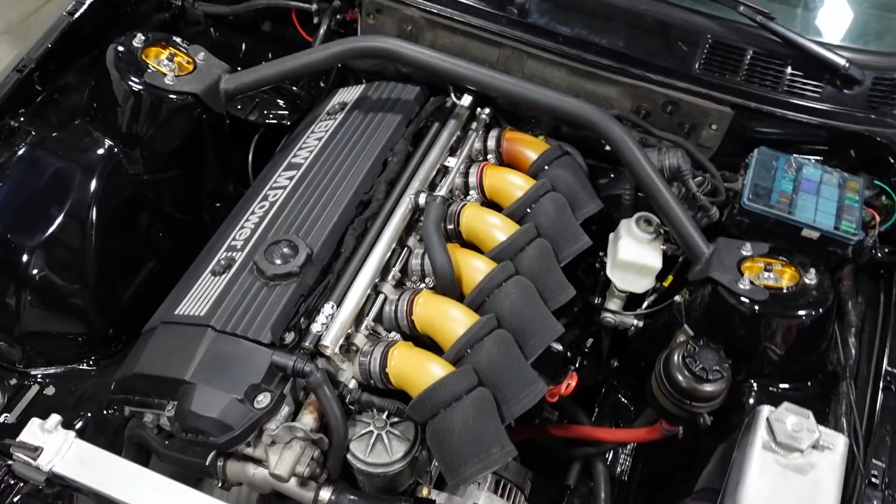What is up, everyone? Today is the big day, hopefully, that we will be dyno tuning the E30. We just did the S54 ITB conversion swap on my S52, which is completely stock. These are S54 stock trumpets, and I shoved some filters on here that are a little too small. We'll talk about that later.

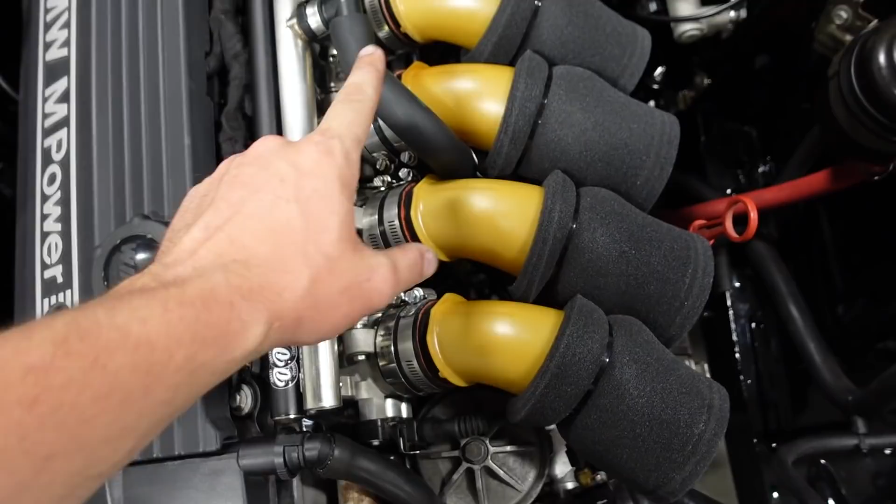Last night I added the IAC finally. One thing I forgot to film was that yesterday I spent the whole day converting the fuel system over. Before, I still had the stock E30 stuff in it, which kind of worked - it had a dinky little pickup pump in the tank and a bigger feed pump on the side by the rocker, so it was a 2-pump system. It was really old and crusty, so it took a long time. I converted it to a single pump system, which we'll see if it's better. I put a DW300 pump in the tank - the DW pumps have always done us so well. Dropped it in there, put a filter in, and now the fuel system is good. We are ready to tune this thing, hopefully, if everything goes well.

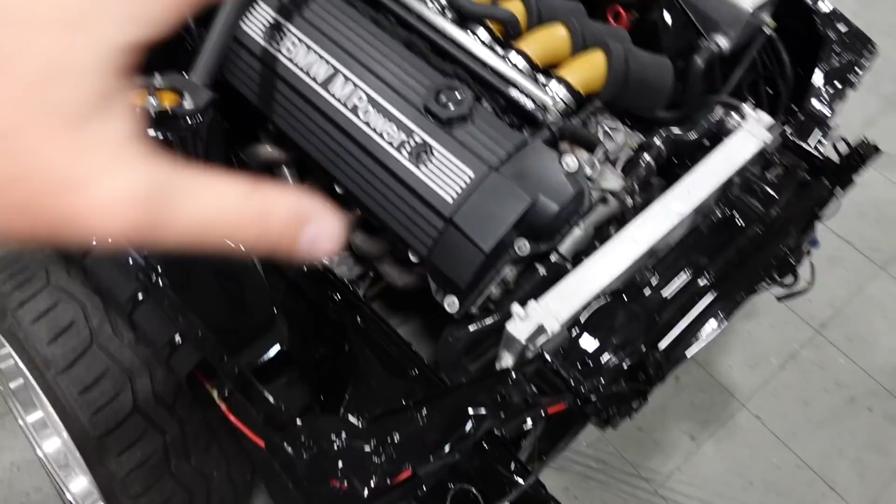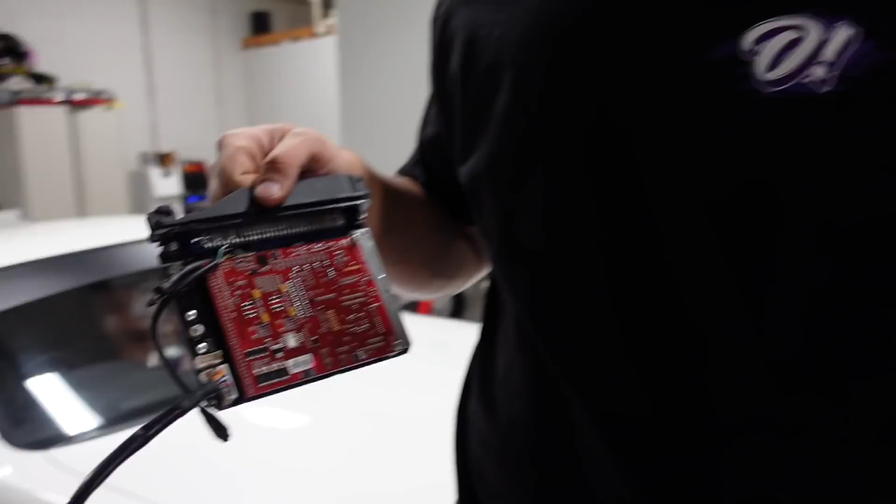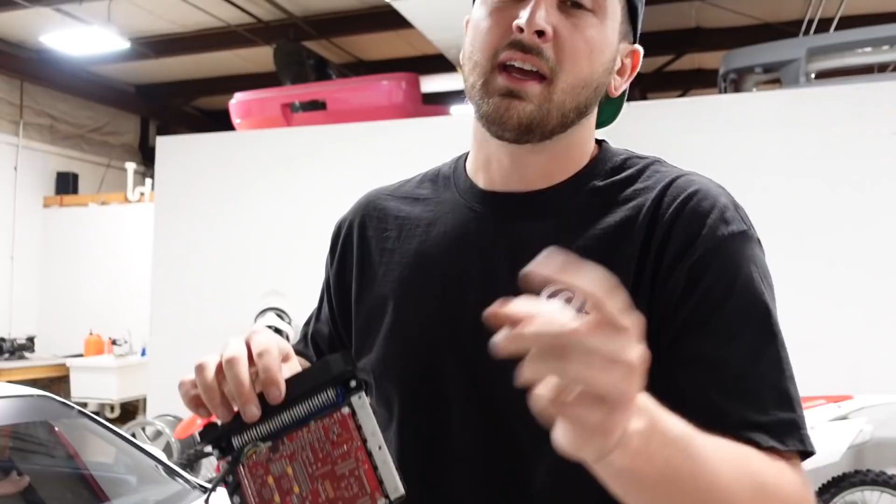So there's one big thing we have to do before we can put this on the dyno. First I had to install my new Link G4X plug and play ECU for the E36. Before I was on MS3 plug and play - it's a decent ECU, gets the job done, but we had a lot of issues with it in Florida, and ever since then I'm not too hot about it. We're upgrading to a Link G4X plug and play E36 ECU, which works with any E36 with an OBD1 harness, and most E36 guys know this. You can convert your OBD2 car to OBD1 by switching out the harness and a couple small sensors. Not that expensive, and it lets you run a full plug and play ECU and get off those stupid chipped ECUs.

This plugs right into the factory harness. You have to take your factory casing to put on here, which makes it really low key. I don't have a factory ECU - that shows up tomorrow, so for now we're just going to throw it in here and not let it touch anything. If you do get a plug and play ECU, I suggest getting the expansion looms because it allows you to add some stuff into the harness, like a fan control and a wideband sensor. So besides that, hop below for all the goods, but let's get this thing plugged in and start setting up a base map.

First time on. There we go. That is good to see. How nice is that? It idles now.

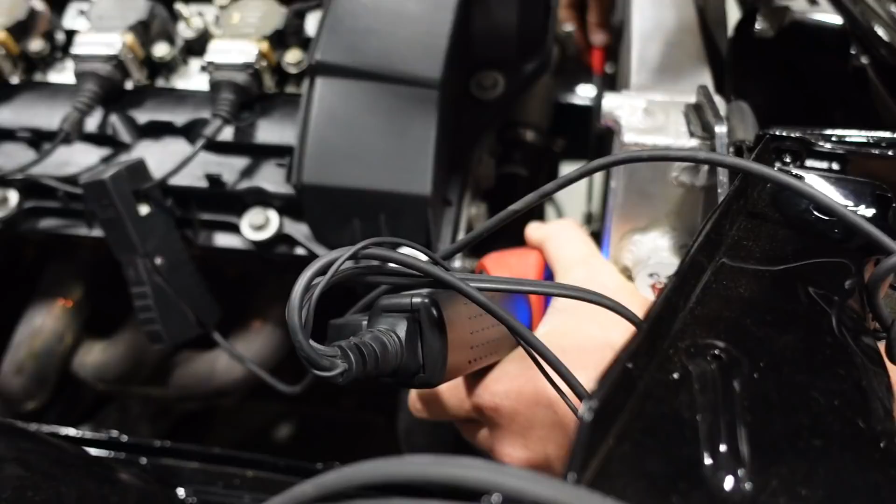This sounds great. Right now we're setting initial timing, which basically means locking in what the ECU thinks it's doing to what it's actually doing. So it commands 0 degrees, and we got to make sure it's actually shooting 0 degrees on the crank. Can't really see, but I've got this mirror, so there we go - look at that, you can see it. Love that, what a cheat code.

She seems happy, she seems tight. The Link controls it so well, it's super crisp, everything looks good. It's holding operating temp, all the sensors are active. I have a pretty rough ignition map, a pretty rough fuel map. Looks like we can throw it on the dyno. That easy.

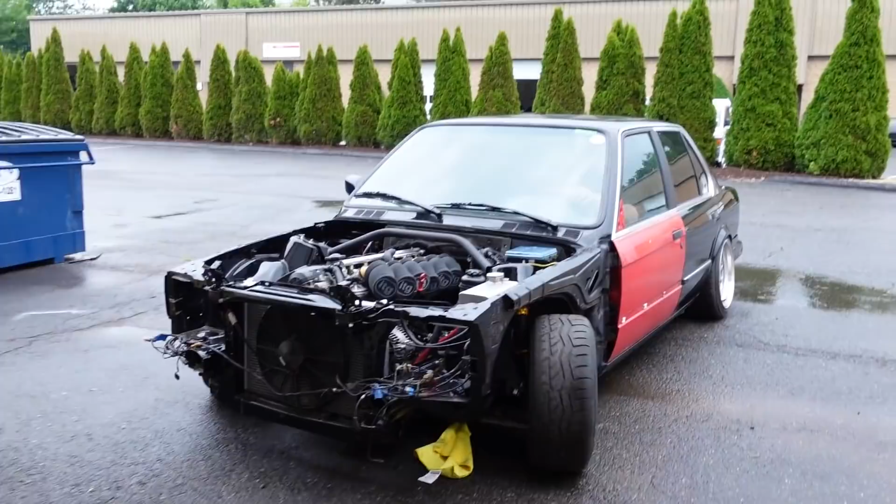I forgot I have to go in reverse.

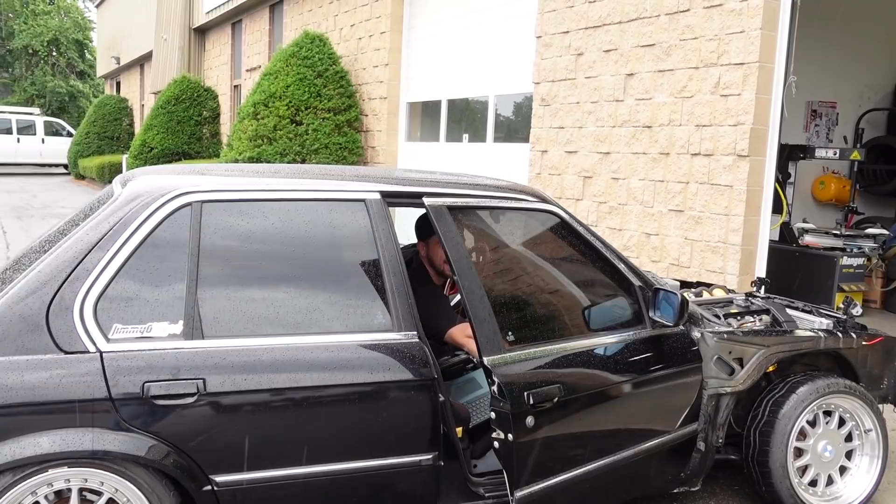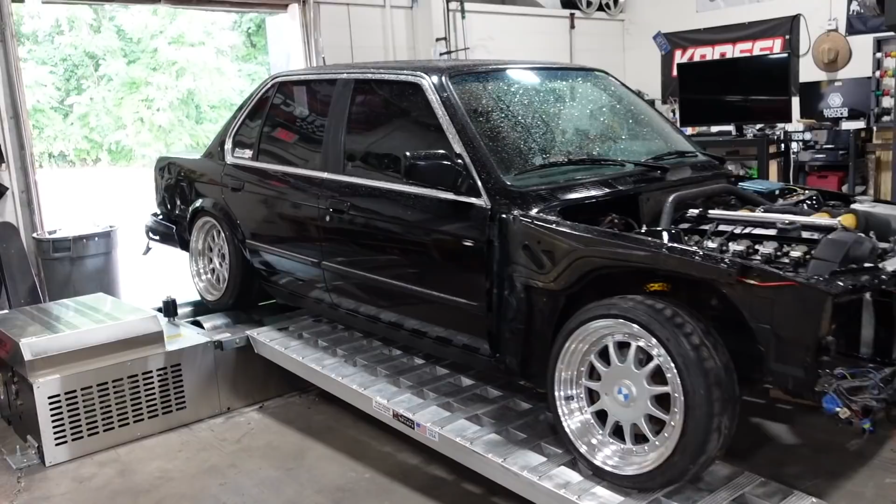Alright, so we gotta do a little bit more talking - I'm sorry, but for the boys here for the information, this is important. We're about to dyno the S52, completely stock long block, with S54 ITB conversions. Now to make it really worth it, upping the compression would be the big one - if we up the compression of the motor, we'd get a lot more gains from it. Even just cams would do a lot for us, but this is completely stock long block, so this is a really base foundation. We have the S54 stock velocity stacks with these filters on, and we're gonna dyno it with and without the filters, because we want to see if the filters are actually restricting any flow. The filters might actually help with torque down low and might not really affect things up top. We're gonna see - this is why we're here on the dyno, to do the trial and error process of all of this.

So before, on a stock S52 with an M50 intake, that's the combo, on a Megasquirt ECU, my last tune made 253 horsepower consecutively. We did 3 runs back to back, and this is before we took it apart. Nice and consistent, so this will be our baseline.

So it's a whole new ECU with a whole new tune, so I still gotta dial in the tune a little bit, we gotta do all that process. But I'm hoping to see by the end of it all, making at least 270. If we can make 270, I will be ecstatic. That's 17 horsepower, which might not seem like a lot, but when you're playing the NA game, 17 horsepower is quite a bit.

If it's a turbo car, you just turn the boost up. Anything else we should add? Don't think so, I just want to get to it. Let's just get to it. So, time to hear some raspy ass BMW noises.

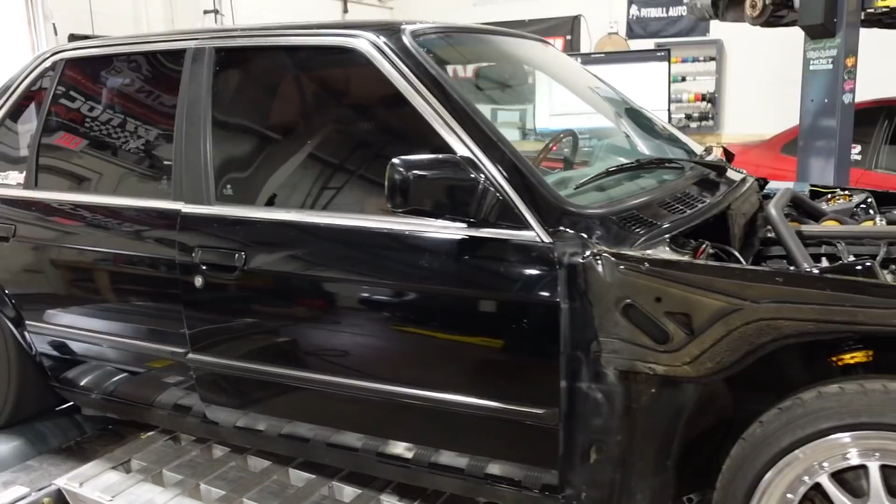Doing a couple pulls to get an idea of what the fuel map is supposed to look like. I think we're pretty close. So dude, I don't know if it's in my head, but it feels like it wants to go. But we keep having issues, the computer keeps crashing.

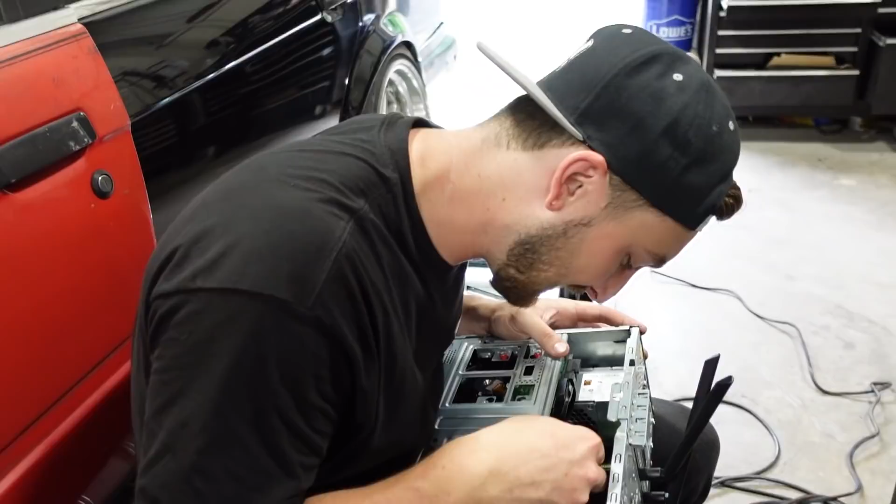I just want to make a damn pull. I don't even think it's the dyno's fault, I bought this computer separate from the dyno. So I just bought a junk computer, so I keep having to hard reset it. Just like... many hours later.

All right, so got on the dyno at 1:30. Computer crash, been trying to mess with it all day. It is now 8 o'clock at night. We've tried everything, IT Poppy himself, Garrett, came out, and we're doing it. The hard drive is just all messed up, it's toast. So I'm gonna take that thing home and fix it.

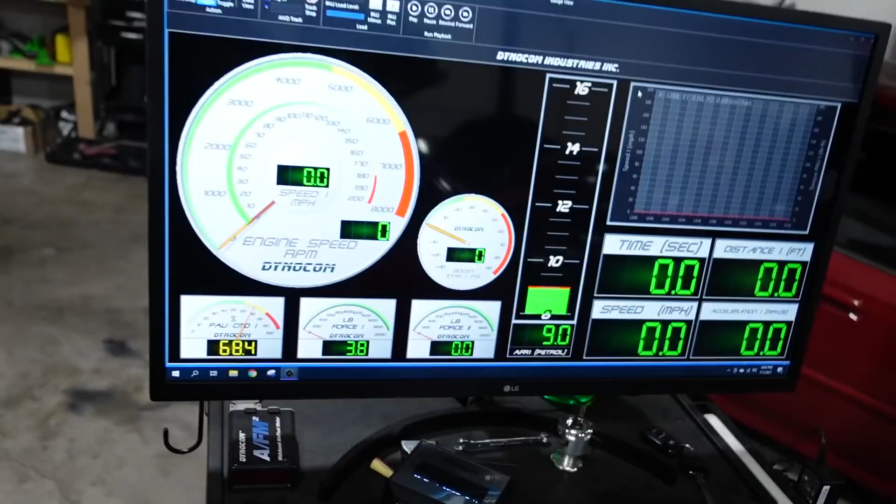In the meantime, we stole RJ's computer up front, the one for the showroom, well, I stole it. It's really small, it's adorable, but it works. Super cute. But we set up all the Dynocom stuff, all the drivers are now in here for all the software. So now it is finally ready to do some pulls on the S52. Let's let this puppy bark.

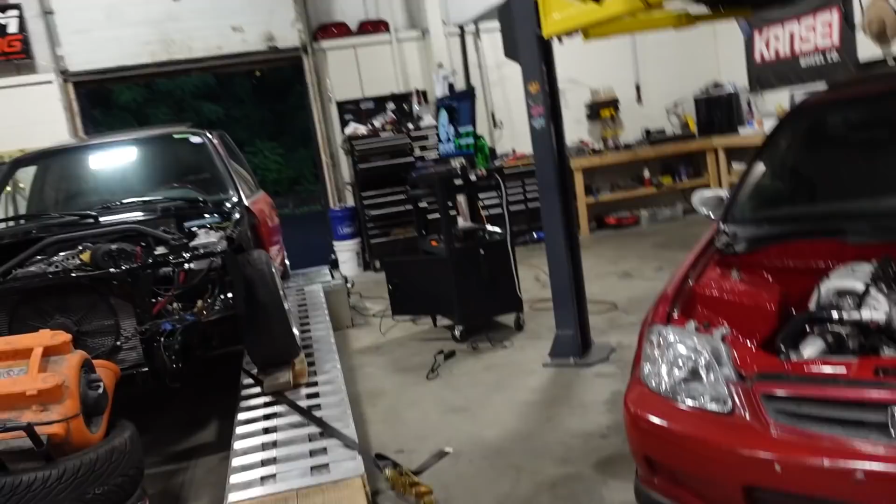In the meantime, Brian pulled his whole rear end out of the E46. Yeah, it'll take you a while to do that computer shit. It's been a long day, and we're just getting started.

So let's do it. But I think last time we dyno tuned this car, we did it in 4th gear. You were there for that, right? It was 4th gear, yeah, I was here for that. So I want to mimic last time as much as possible. Man, we might have to review the footage. I did, I couldn't tell.

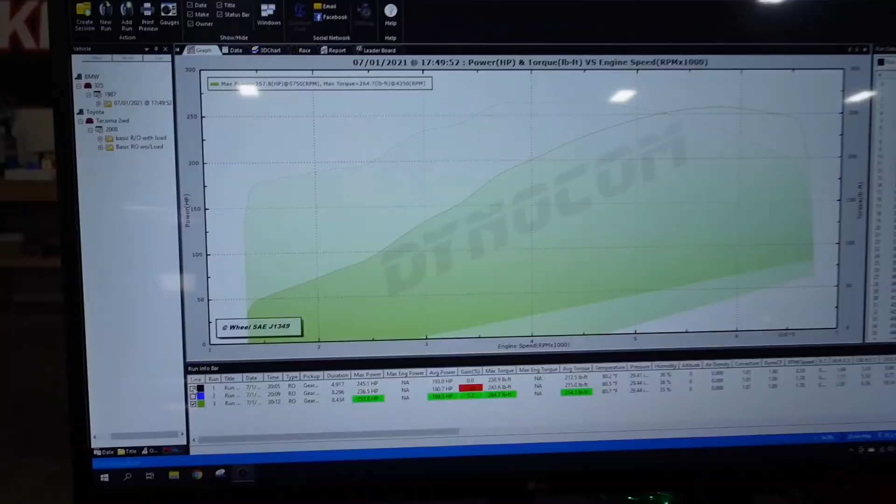The first 2 pulls, I tried to mimic the dyno settings that I thought we did the first time, and it didn't seem to be working out too well. So with that last pull, we just used the standard dyno settings regardless of what it did last time, and we got some good numbers from it that time. So check it out, we got 257 horsepower and 64... We can't overlay the old data because the computer dumped, but before we got 253 horsepower and 256 torque. It made a little bit more torque in the mid-range. I wish we could overlay it because this is so... Surprisingly it is actually the same curve.

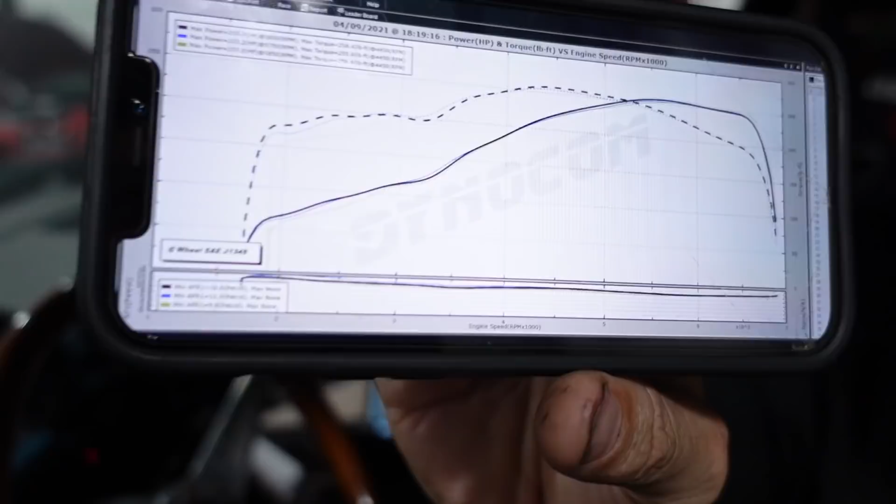It's not much different. So now what I want to see is I want to take these filters off. Let's just get those out of here, let her breathe.

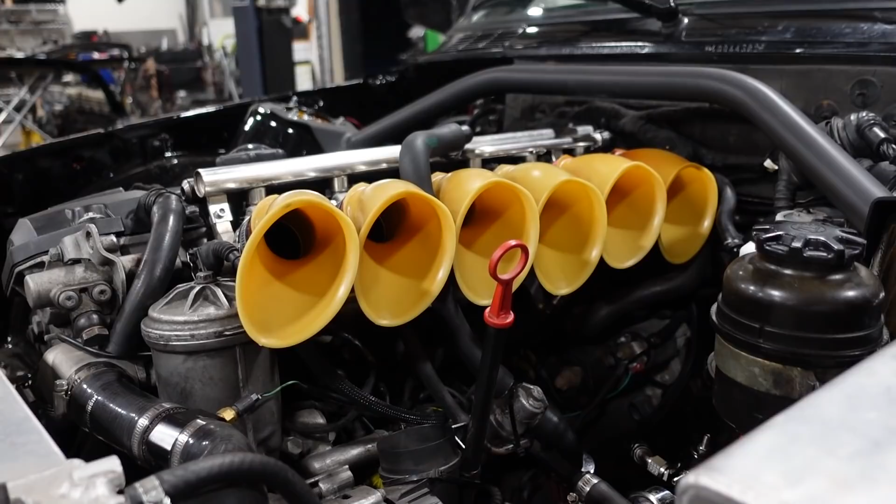So I lifted, and the reason is because it actually started to lean out pretty bad. That shows how when we got into top RPMs, those filters were really restricting it. Overlays the graph pretty spot on. I was actually expecting to see it lose some torque down low because sometimes that resistance will promote torque. Let me just fix the fuel map because it leaned out fast, and I actually put more fuel into it, which is crazy because I knew it would. That's good news, if it wants more fuel, it means it's gonna make more power. More air, more fuel, more power.

Yes sir, that's what I like to see. Look at the last 800 RPM, look at it, it took off. That means we can get that curve to arch up even higher. So 276, that is the number I wanted to see.

You also got 270 foot-pounds of torque. Either way, we're already up 16 horsepower, and I know we're up way more than that in torque. When we first put them in 4 days ago, you said 10, 15 horsepower, or you said 15, 20. You're already at 16, there we go. You need 4 more horsepower and that'd be the top of your goal.

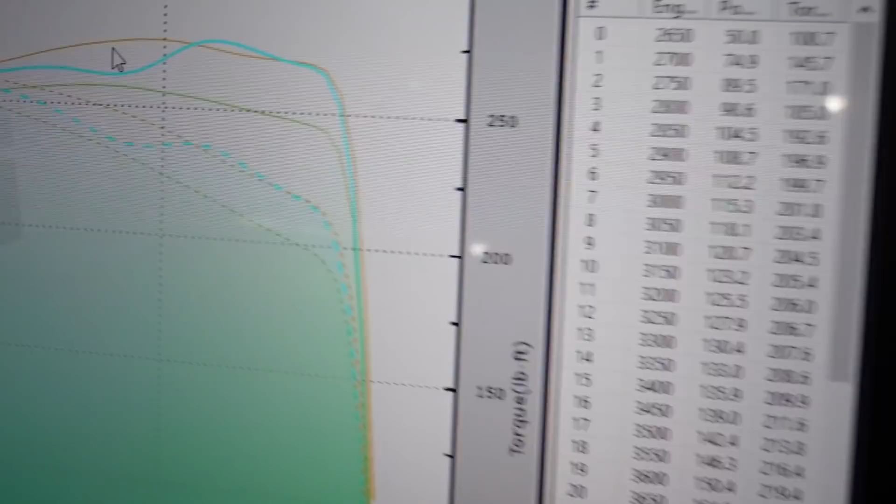There we go, see that? Pulled right out of it. Nice. So the peak power is not much different, but we were able to smooth it out right here, got rid of this dip, and it liked it. Still gotta do a little bit more smoothing, but it doesn't seem like it's gonna make much more peak power, if anything, but pretty happy with where it's at right now.

Hey, get out of the rain, now you're gonna get sick.

The one thing I don't get to play with too often is the injector firing angle, or the injector timing, whatever you want to consider it. At what point the injector actually opens up in the intake stroke. That's kind of something you don't really think about. It's all about the small gains on NA.

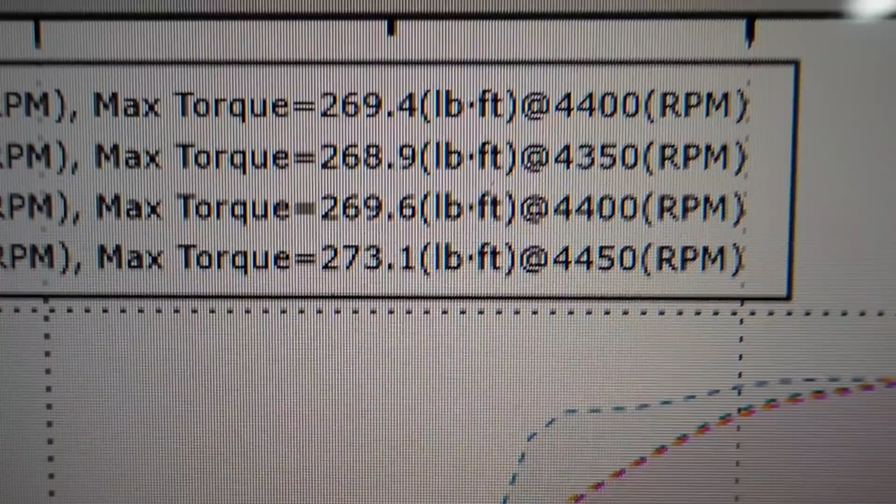Oh shit, she loved that! So instead of using the OEM injector timing, we pulled it back a little bit, and dude, it picked up 4 horsepower.

I could get it to make 280. Dude, 280, you're on the cusp. You know what it is? This is the muggiest day we've had in a while. It's hot as hell, you can see me sweating and I'm not even doing anything physical. If we waited till a nice low humidity, like 75-degree night, we'd probably pick up another couple horses.

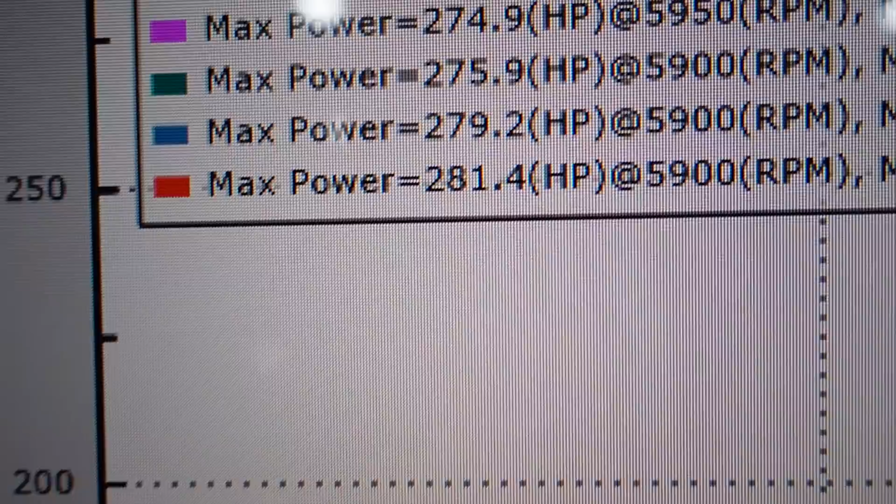I've never been so hyped over 2 horsepower in my life. That's cool, we never get to do NA setups, it's always turbo setups, so we never get to fight for horsepower like this. That's so cool. 281, 281.

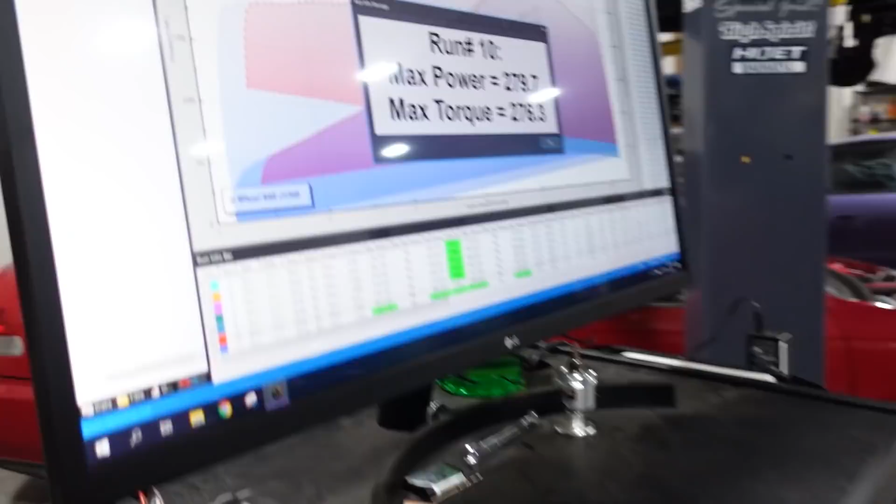It's the clutch. Yeah, you got nervous, I saw your face. You thought I got knocked, huh? Now it's the clutch - when you put a single mass on these things, you get a little chattery. You should have seen your face, you thought I lost the motor.

So 281, dude, I can't complain. How much further did you go? Are you gonna try to find that happy little spot, or do you think 281 is it, or is there a 282 in there? I didn't move it much - if I moved it a lot I'd try to split the difference, but yeah, it made less power everywhere.

Actually it picked up a little bit down low, right where it transitioned in, and I liked it right there. Keep it there, take it back everywhere else. Exactly, and that's what you did.

All right, we need the Street Racer Gym special. The Street Racer Gym special. All right, here we go. There we go, he flipped the hat around - that's how you know.

Oh my God, dude, she hammers. Wow, that is really fun to watch. That was awesome.

She was bouncing around for a little bit at first. Yeah, the double rollers give you some confidence. I like when you launch it on the dyno, that's sick. Every car's got to get it done, but do the typical thing - pull it off, beat the shit out of it in the parking lot, do a little drift. But it's pitch black out and it's raining, and there's no headlights, so we got plenty of excuses.

So, 280 horsepower. I don't remember what the torque was, but it was up there - 276, I think, was the most. Looking at it now, that comes to a big question: was it worth it? The ass dyno is a whole different thing, right - when we finally drive it out on the road, the street ability of it, that's a whole different story.

Talking about true power gains alone, I would say it was worth it. Almost - is that $10 per horsepower? What's the dollar per power? I don't... we're not going to talk about that. $100? We're not going to talk about that. I'm not good at math. We're not going to talk about it.

It's expensive. I think as kit renditions come out, they'll get a little bit cheaper. But for now, if you could solidify yourself a set of stock ITBs for a good price, and a stock airbox too, because you got to cut it up, I think it's worth it for sure. Especially for NA gains, you can't touch that.

And like we said at the beginning of all this, it wasn't about the number gain, you know what I mean? It was going to be about the drivability, the response, the sound, the feelings - the experience.

Now how are you gonna pick? You've got that running again. This isn't running again. He's not going to drive any of them, he doesn't even need to pick. What are you talking about? Oh, the E30 is my favorite thing to drive ever. Actually my favorite thing I read recently was that Jimmy bought a dyno as a loophole, because this way he could drive his cars and still park them at the same time - never have to worry about being too far from the shop for damages.

Well, she did great - so, RRD ITB kit, a nice little link ECU, and some DeatschWerks fuel components.